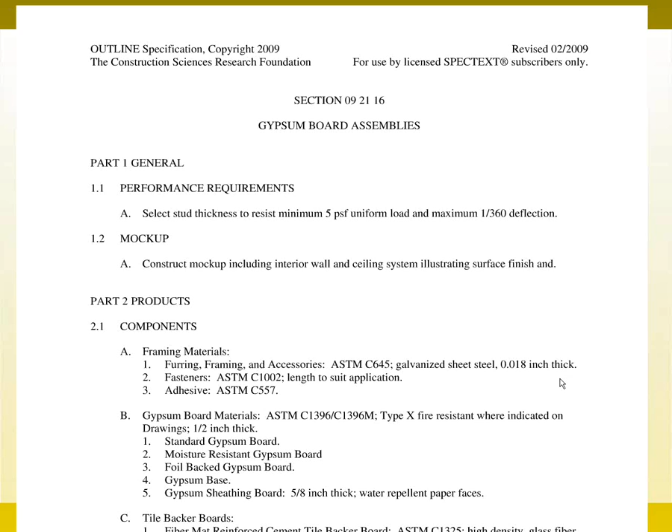Then here's an example from SPECTEXT. So you understand my bias here: Conspectus, my firm, is actually responsible for maintaining SPECTEXT. Take what I have to say about SPECTEXT with that bias in mind, and whether or not you agree with all of it, you're certainly entitled to your own opinion. But here's a listing from SPECTEXT, still at gypsum board, showing a little bit more of the technical detail, the reference standards that would apply to more of the major components included in the section. It does go into a little bit of the installation and the quality standards required for the installation.

So, yes? Clifford has a comment. In his opinion, PPDs would replace the outline specs. Did you have a slide that had the categories listed? Is this a question from Clifford? Yes.

Categories of what, Clifford? Help me out. I have some other examples coming up that I want to show too, as some alternatives that we've experimented with, so maybe that'll help explain where we want to take the discussion and then open it up. Okay, so components, warranties, etc. He said it was 2 or 3 slides ago.

Is Clifford on the phone, or is he just chatting? Clifford is chatting. Oh, it'd be nice to get you on the phone, Clifford, if you were able to do that. I think we may have convinced him to go live. One moment. Clifford?

Clifford? Hello, yeah, I'm here. Can you hear me? Yes, absolutely. Go ahead. I just didn't want to take over your presentation.

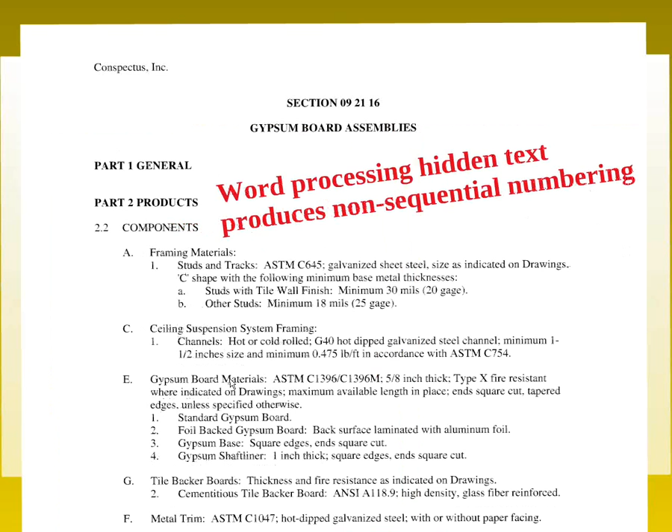So here's what I'm able to produce as what I'm calling an outline spec. You'll notice I still use the part titles, but when I get into part 2, the first heading is 2.2 Components, and it may look a bit odd because as you look down through the numbering, it's not sequential. It's something you have to just accept as being part of Microsoft Word, because the tool I'm using to produce this, there's absolutely no way I can find to get around this other than manually numbering the paragraphs, and I am not going to go there.

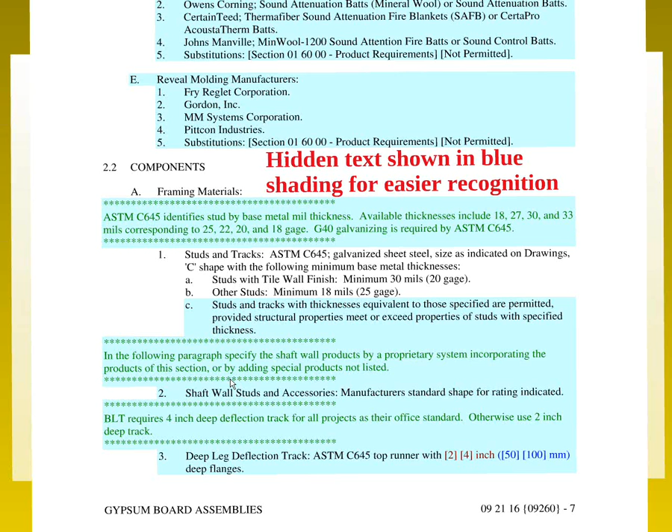But I'm able to produce something that looks like this in fairly short order with a feature using hidden text. So here's what the document actually looks like.

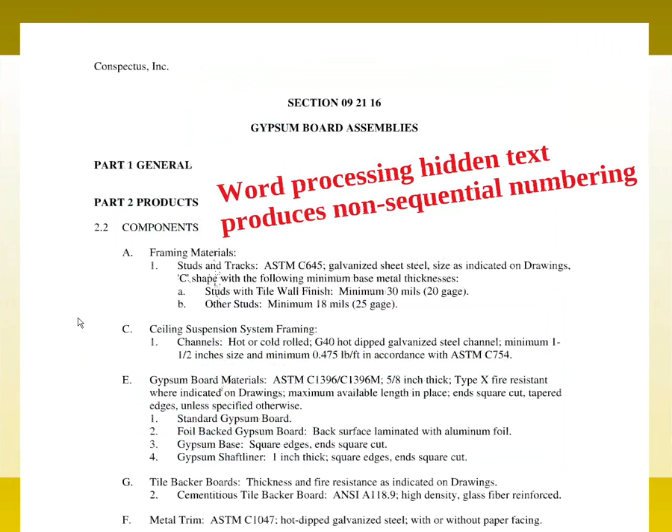It's actually our construction spec that we would use to produce full construction specs, and what we're doing is using tools to hide the text. So everything here shaded in blue is actually hidden text. If I go back and just show you here the framing components, you can see at the top of paragraph A, the framing materials, and come back over here, and that's the exact same text.

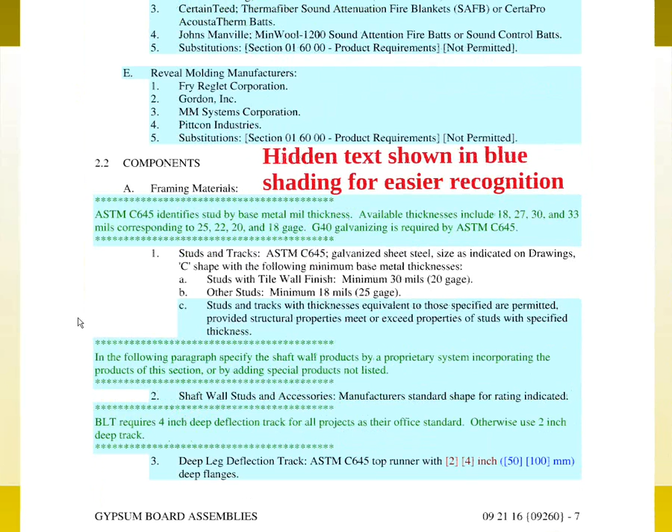I don't... Dave, can we have you speak up just a little, please? Oh, sure. Thank you. Yeah, thanks for keeping me honest here.

So I don't have to recreate anything. I'm using what I will be using for construction specs. What I find is to be able to use this kind of method, I have to rethink how I'm organizing the text in the construction spec so that I put what would normally be used for an outline at a very high level in the outline structure, and use lower levels for things that are less important, so that I can hide those quickly by just using hidden text.

So Clifford has a comment. He wants to know if you're essentially hiding and then revealing as necessary as progress is made in producing the whole document. Exactly, that's exactly what we're doing.

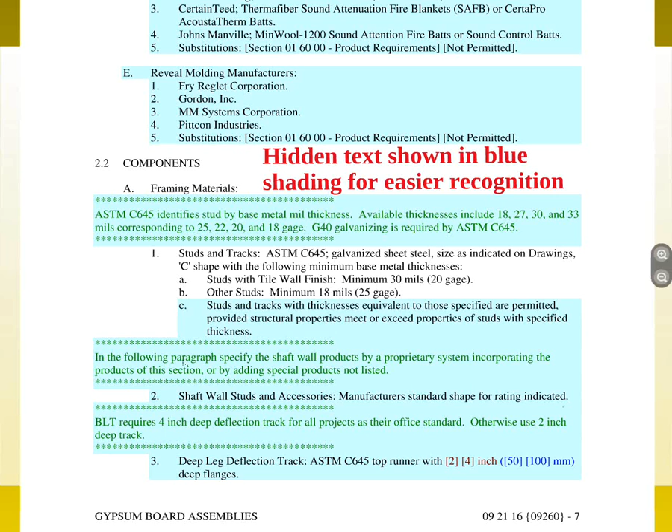Because as we start the construction specs, we'll open this up. We'll see all the blue shaded text, which is all hidden, so we can unhide it as we go. Let me see if I can do this. Here's this same gypsum board section out of our master guides.

If you can see up here on the toolbar, we have these tools with the blue shading. These are macros that we've written to help us either hide the text, unhide the text, or delete the text. So it's really, from our perspective, fairly easy. If I wanted everything that was the lower level below the studs and tracks, we have a macro to run, and it automatically selects all of the lower level of that outline branch and hides it. So trying to go through a section and quickly hiding the text to make it into an outline looking form goes very quickly for us.

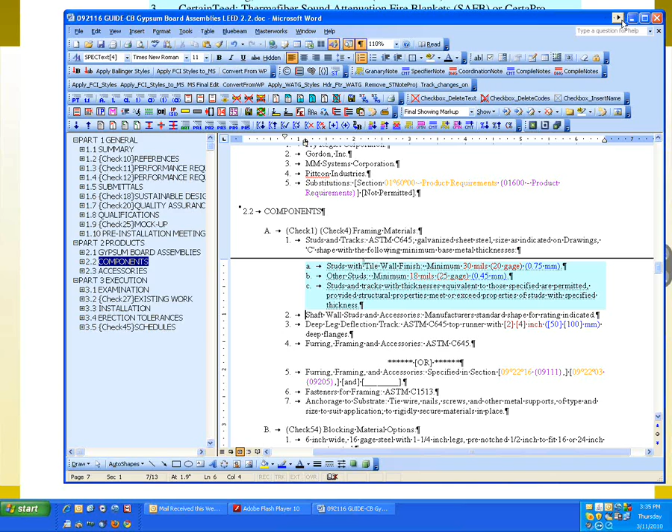Okay, so just to show you some more of the example here, this is going back to the same text that we were showing, and this is just going through the entire section to show you how much text we're actually hiding.

So the discussion that Clifford started out with, preliminary project descriptions, and I started the whole conversation saying that this is what we're actually suggesting to most of our clients as the alternative to outline specs. We think it has some really distinct advantages. We think it's more easily understood by the owners and lenders. And actually, when we're doing initial interviews with the architects to try to find out what the products are on a project, even if we have a table of contents that we've developed and we're trying to go through the table of contents by master format arrangement, the discussion quickly transfers to a uniformat arrangement.

And that's how preliminary project descriptions are written, using uniformat, because the architects are much more in tune with thinking about the project by system and assembly, so that if we start talking about brick and block as a masonry section, all of a sudden the conversation changes and we're talking about exterior wall as though we were talking about preliminary project description and uniformat rather than brick and block. So what we find is that it's even to our advantage to talk to the architects starting the project more in a uniformat or preliminary project description organization than it is to talk to them about it using master format.

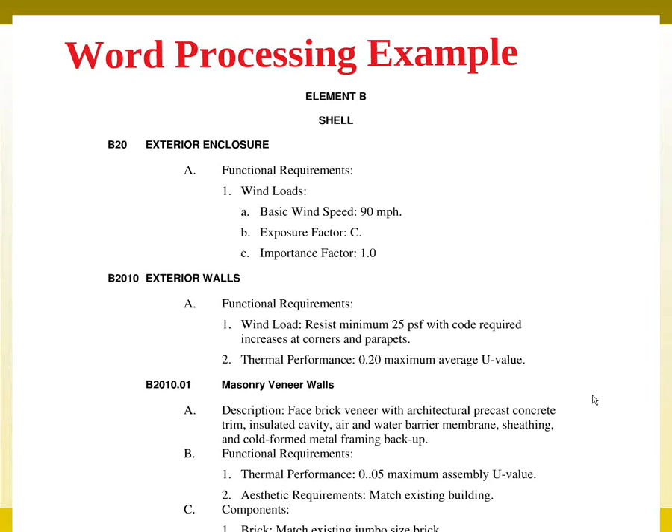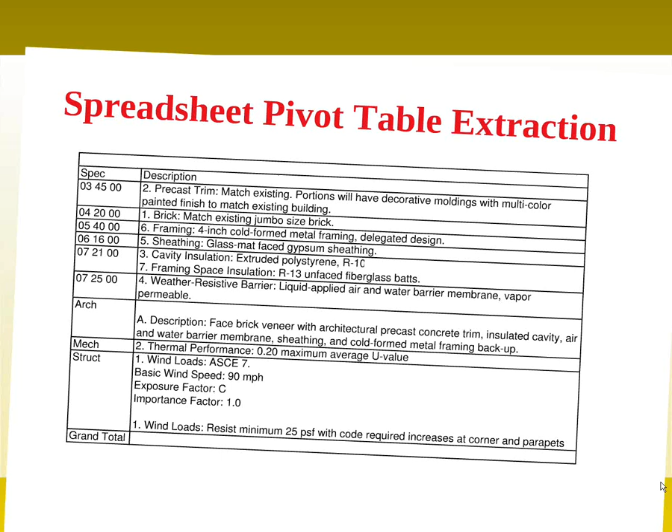So, disadvantages, if any. Anybody have comments? Most of what I see with the multi-purpose specs and the PPDs are advantages, especially compared to the traditional separate files for outline specs.

We have a comment from Clifford. He says you're stating all the good reasons for using PPDs over outline specs. I think we have a convert. I don't know that Clifford actually ever used outline specs, but I'm glad he likes PPDs.

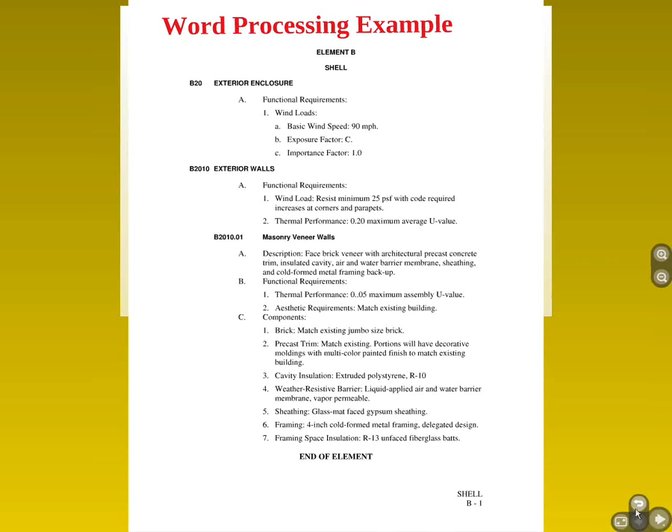So, is there anyone else out there like Tom that's doing something entirely different and willing to share? We have a couple minutes left before the hour. We have a comment from Liz. Just a moment. She had her hand raised, it's down now, so perhaps you've answered her question. No more comments at this time.